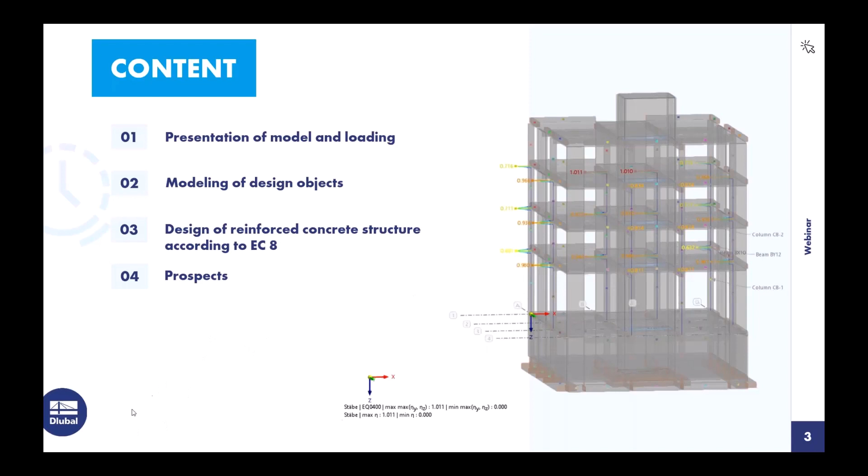For this, we have webinars provided on our website where you can follow the concrete design in detail. Then you also need to do the seismic analysis according to Eurocode 8. For this, we also have special webinars provided on our website, where you can follow the modal analysis, the response spectrum analysis, in detail.

We now go to the program. I open my model. I want to open this one. Yeah, this is the building we will have a look at today. But before we do this, we open the base data.

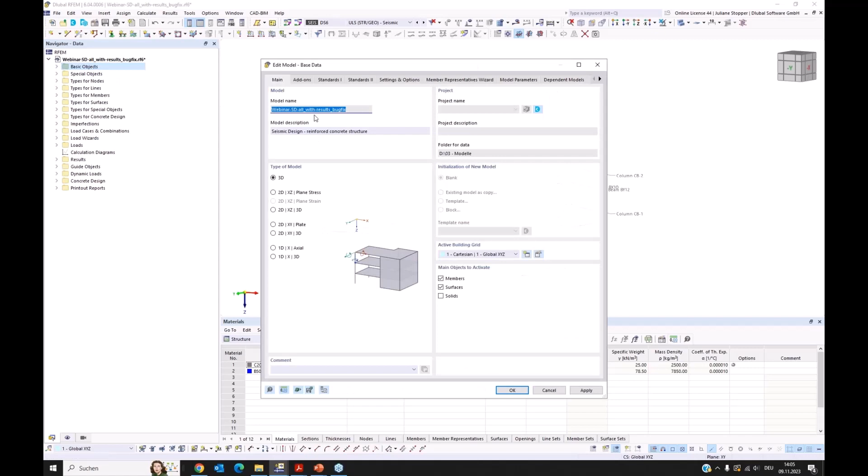In the base data, you can see we have our register for add-ons. In my model, I have the concrete design active, and for dynamic analysis, the modal analysis and the response spectrum analysis active. As you know, in our finite element program, when you activate these add-ons, the needed input dialogues and program parts and output for these add-ons are integrated.

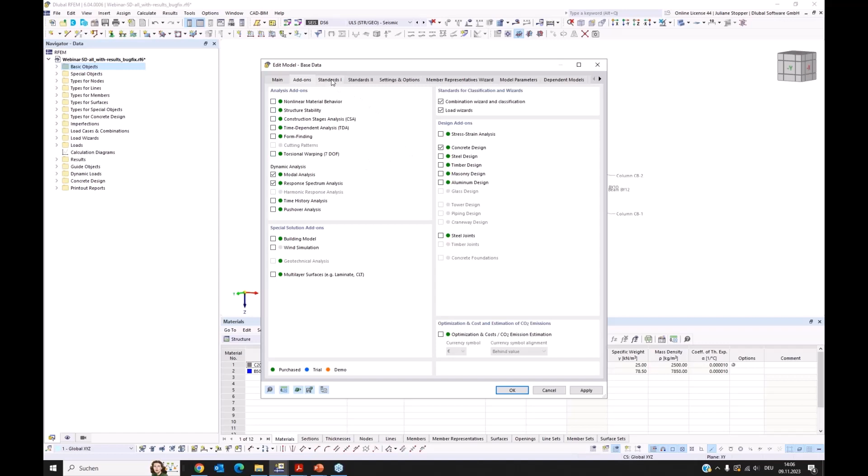So what we need to look at next is the standards register, because you have to tell the program according to which standard the design shall be done, and also for the dynamic analysis it is needed to be given. So today we will use the Eurocode as standard, and I want to show you we have here an overview of activated standards. If you select the concrete design here, you can see the standards activated in the concrete design, and you can see that we have Eurocode 8 now integrated.

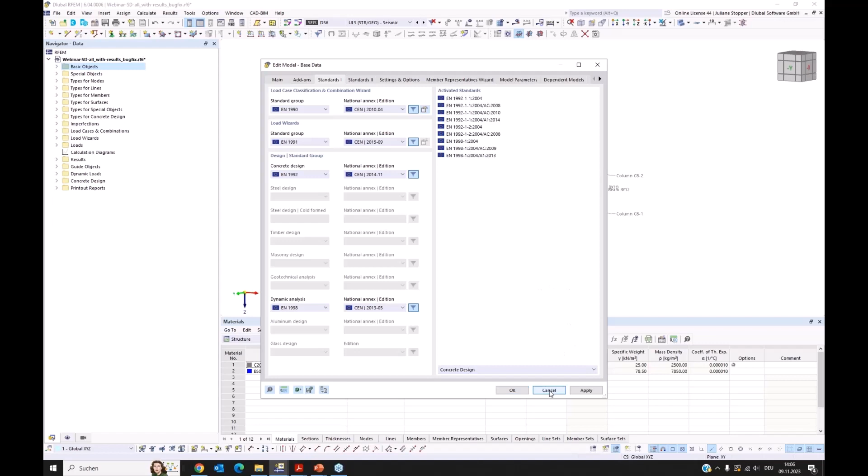Okay, this is enough, I think, for the base data. Nothing else that is new. Then we can go back to the model and have a look at it a bit.

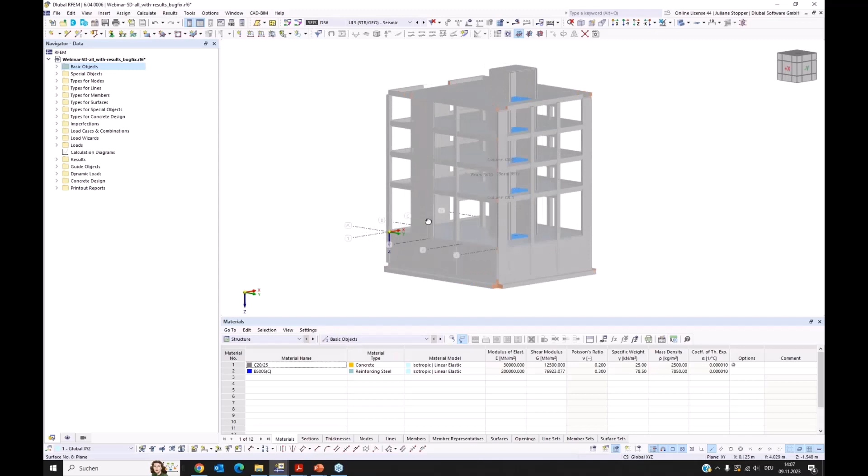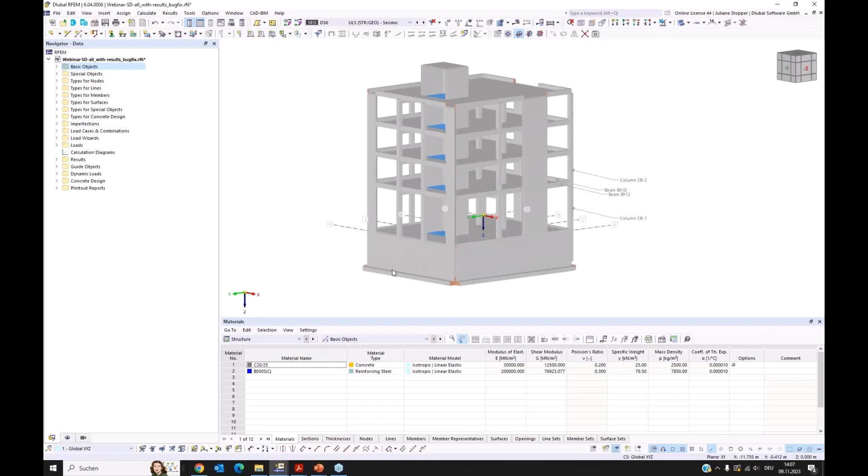So it's a reinforced concrete building that has 5 floors, and we have shear walls at every side, at least one, and we also have this U-shaped concrete core here in the center of the building. We have columns that go from the bottom of the building up to the top continuously, with the same cross section along all over the height. And we have beams between all vertical members placed.

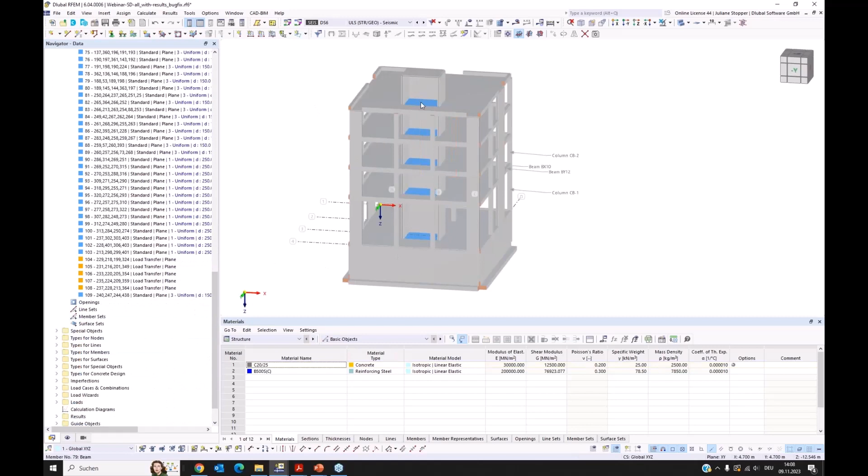You can see these blue surfaces in the building. They are used to allow load transfer surfaces, for giving a simplified load for the staircase. Okay, I go back to the top and close this.

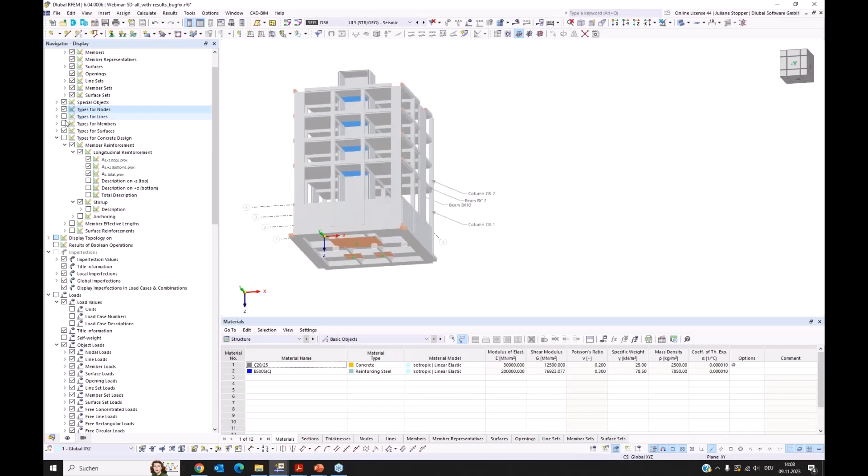Then, this is what I wanted to tell. Maybe I can show also the supports. I have nodal supports at the bottom and line supports. We can activate here, and there you can see that it's grounded on springs.

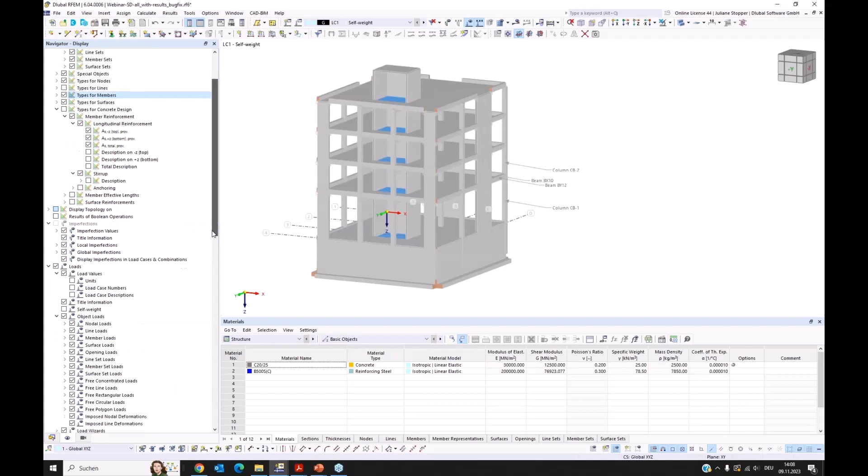Okay, then we can have a look at the loads. We can activate them here, and I have in my model the load case 1, which is for self weight. If you want to check what the program calculates from the cross sections and the materials weight, you can have a look at this and check these values, for example.

Okay, I deactivate this. Then I have in my building a dead load placed, and also a live load.

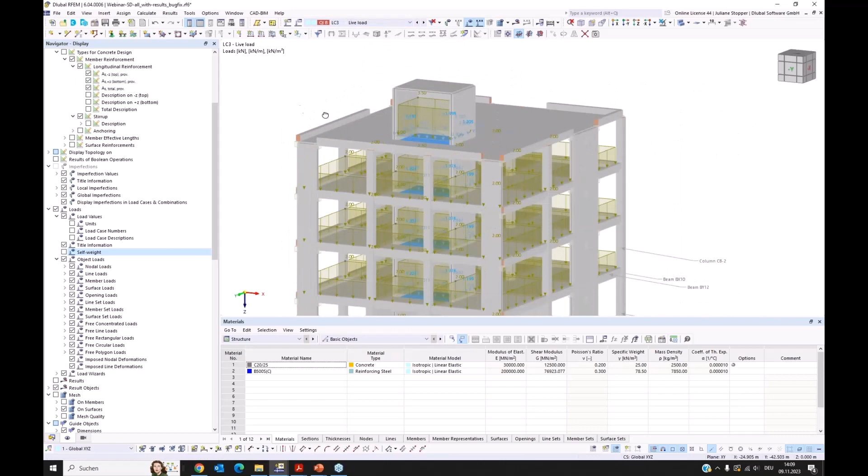Then I want to show the dynamic loads. Therefore, I go into the dialog where they are defined. We have here load cases and combinations, and I open this. Here we can see our load cases. So we had a look at the first 3 of them, and my 4th load case is a load case of the analysis type modal analysis.

So it's selected modal analysis, and there we can check the modal analysis settings. I will just show them. As I said, we have extra webinars where you can see in detail why which setting is needed or used, or something else, and we also provide trainings for this.

So in my situation, I have 10 modes considered, and we consider the X and Y direction. In this register I have user-defined settings, that I neglect masses, and I neglect masses from some structure parts that are placed in the support plane, let's say at the ground.

Okay, then the modal analysis needs a load case or a load combination defined. From that it can take or import the masses. So I have this combination 8, and from that the masses will be taken in my load case 4.

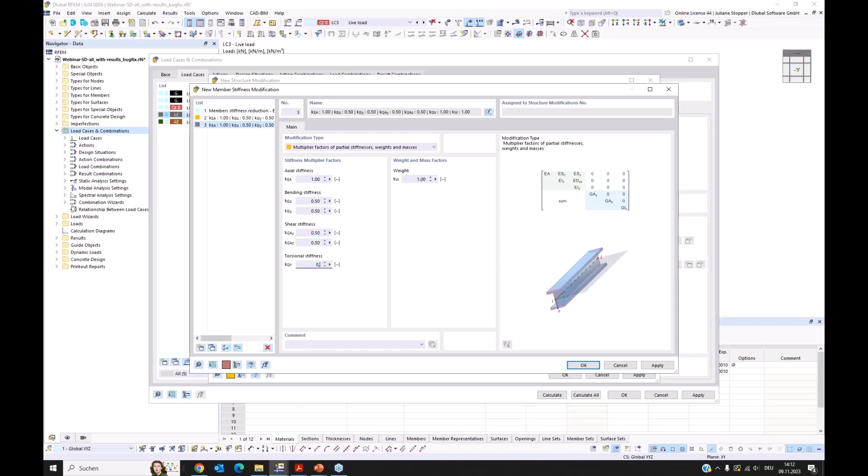And I select the modification type. I want to have factors for partial stiffnesses, and here I can select reduced stiffness of 50% for bending and for shear. In my model, I have torsional stiffness of 10%. Okay, and then you can assign it, and you have a stiffness modification here.

This is what I now created. And you have to assign the members, of course. I only wanted to show this, I have this already prepared. I can remove this, and we can have a look at it.

Here, like I said, you can define the stiffnesses and reduce them. I also renamed it, so it's easy to follow why I have this here. It's according to chapter 4.3.1 of Eurocode 8, clause 7. Okay, so this is how my modal analysis load case is defined.

Then I have my response spectrum. I have this analysis type, response spectrum analysis, set for this load case, and this load case needs a modal analysis load case assigned, so I have my load case 4 assigned here.

And I have spectral analysis settings for this case that I also only want to show. I have the SRSS combination rule, and I have the settings activated that I want to save the results of all selected modes.

And the directions will be combined by the 30% rule. Yeah, these are the settings that I used in this model, and the accidental torsion is activated.

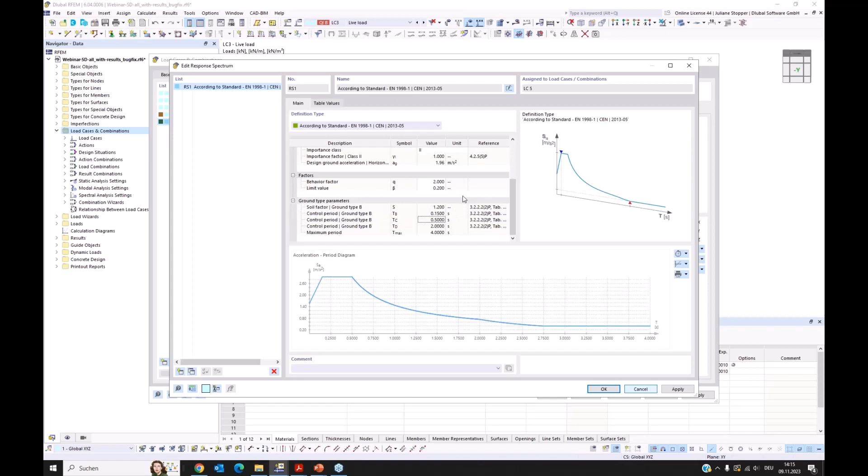So we have in our response spectrum the behavior factor 2 assigned. And we can also see here these ground type parameters, and we have these periods, and this one, the TC, will also play a role later in the concrete design. Okay, then we can leave the spectrum. Yeah, that's it, what I wanted to show for these dynamic load cases.

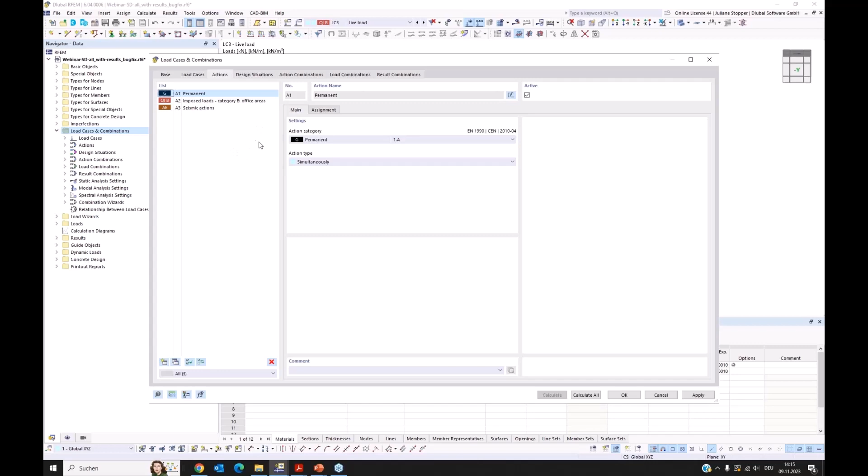Then we can have a look at the further registers. These are the 3 action categories that are now modeled in this file, summarized. Then we can go to design situations. We have the design situation 1, 2, and 4 that are known from the concrete design according to Eurocode 2.

And we have this design situation 5. This is the design situation that was created for receiving a load combination where the mass for the modal analysis can be taken from. So we have here design situation type. We can open this and we can see seismic mass combination type.

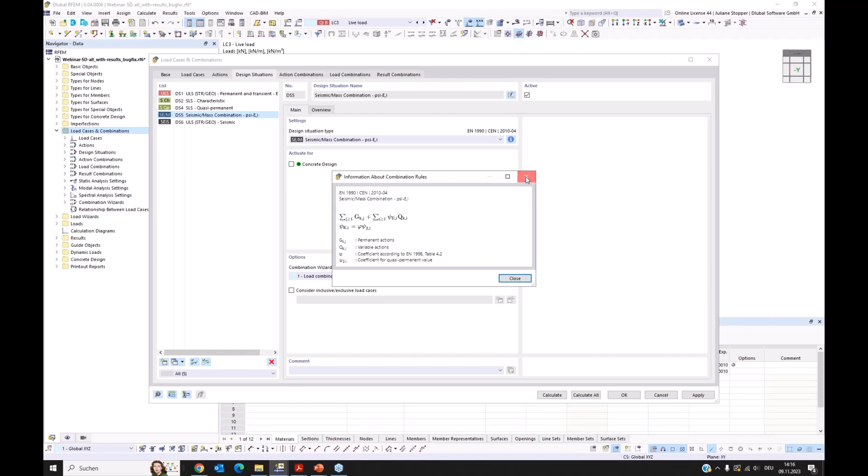Yeah, and if you want to see the rule of combination, you can click on this button. So this is the design situation type. This is the design situation that creates my load case for the modal analysis for the masses.

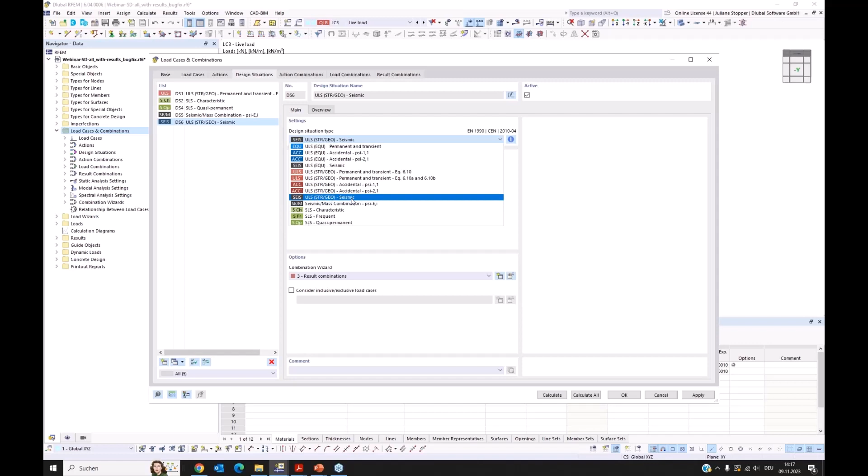For the concrete design, I need this design situation 6. We can have a look at the types again. There we have the seismic type, the ULS, STR, GEO, seismic. This is the combination type

according to Eurocode 8, for the seismic design according to Eurocode 8 for concrete members. Yeah, for other designs it could be also used, of course, but now we have here concrete design.

And we assign a combination wizard here. We have the response spectrum used, therefore we need here a result combination type. So this design situation generates result combinations for us. When we look at the previous design situations, they create or generate load combinations.

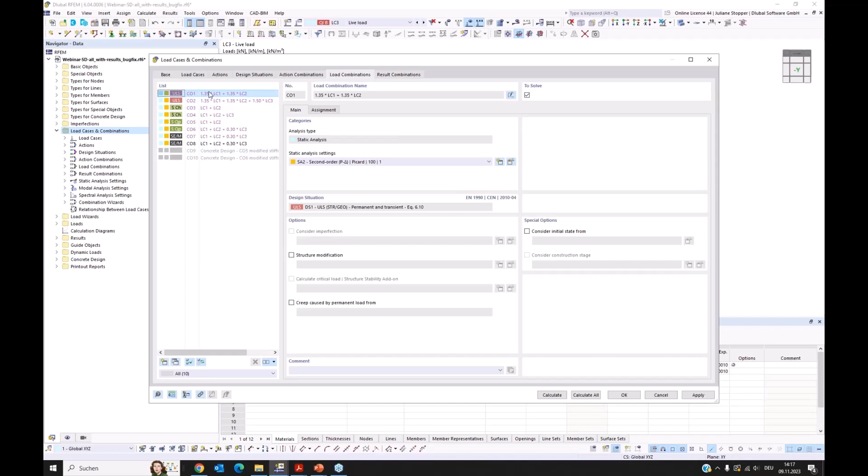Okay, then we can see our actions combined, and here are the load combinations that are generated from the first design situations, and we have here in the result combination the seismic result combination. Okay, that's all what we need for the design from the loads.

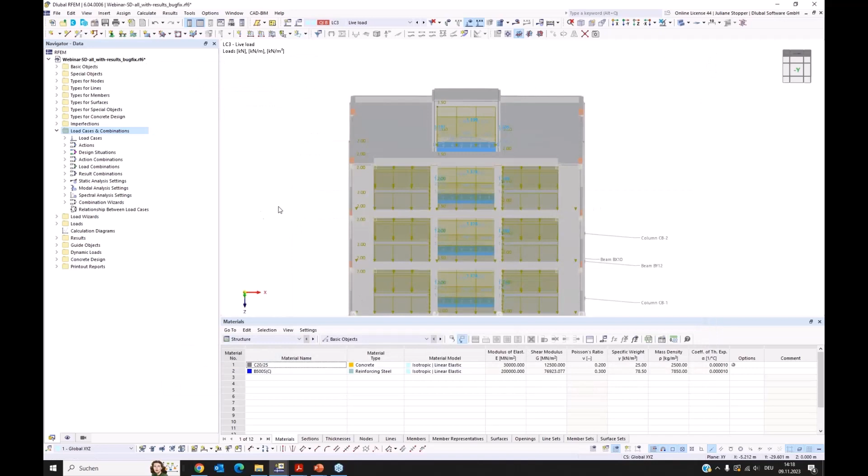I will close this. I have already results in this model, so I don't save a setting or something. Okay, this is it from the model and from the loads. I would like to shortly show you some results here.

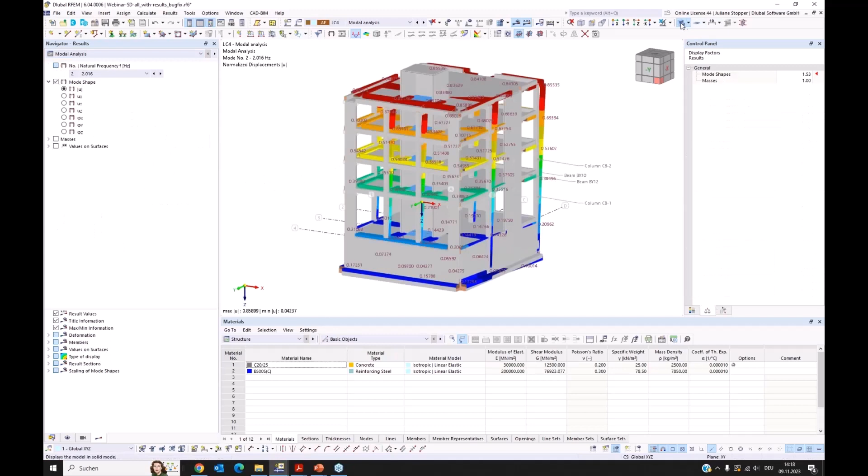We have results that we go on the results button. We can shortly see the modal analysis. Yeah, here we can see the first mode shapes.

We can see that the first shape is more in the Y direction and the second in this direction. No, this one is the Y direction, the first one was the X direction.

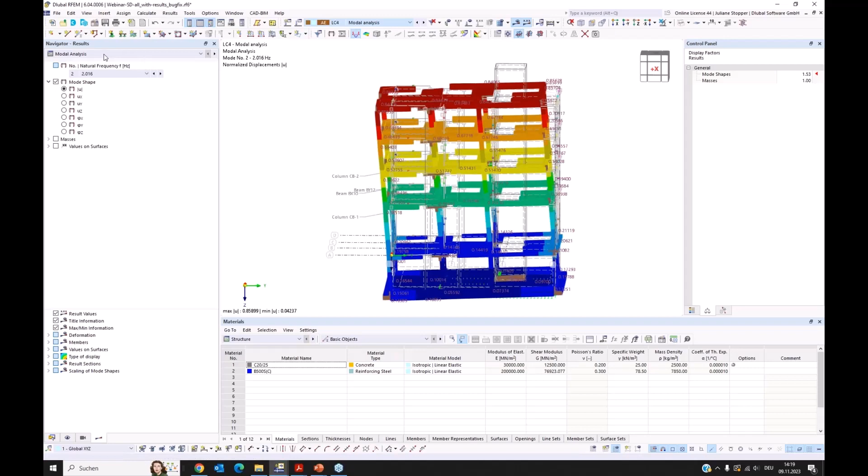So we have the modal analysis results, and we also have the response spectrum results. In the response spectrum, here spectral analysis, you can check the inner forces that come from the response spectrum in the members. These forces then are taken for the result combination and later go into the concrete design.

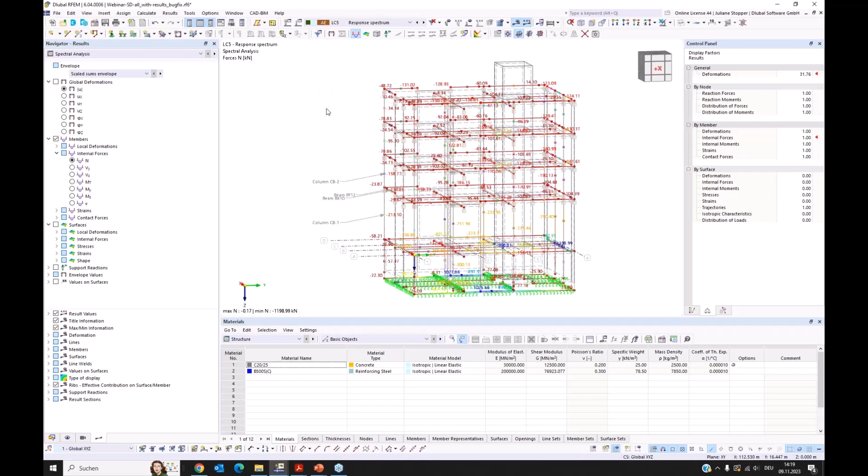Okay, so this is a short view on results. I will again switch them off and we go back to our navigator. Now I want to come to the concrete design.

My model already has reinforcement. I can also show this. Yeah, we have in the navigator display, we have the option to display the reinforcement, and I will do this now just shortly for you.

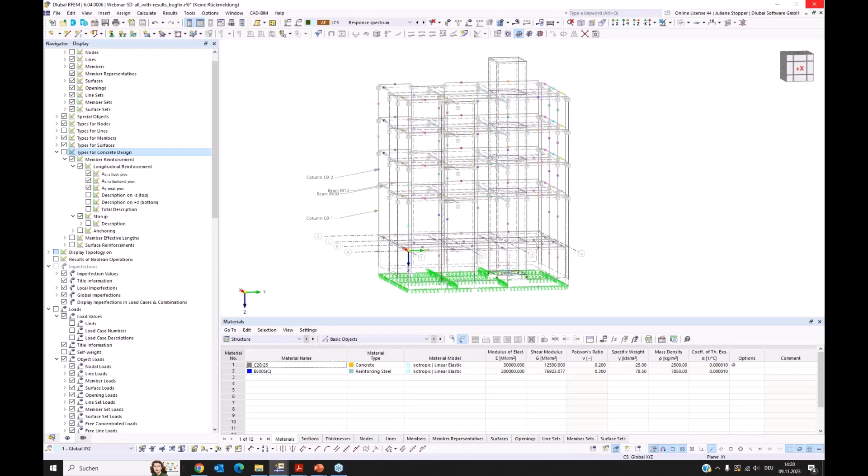Here we see all the members in my building that I have reinforced now.

If we look here, I can click on the column, for example, and do a right click, or you can also do a double click on the member. This works as well. I want to show the reinforcement.

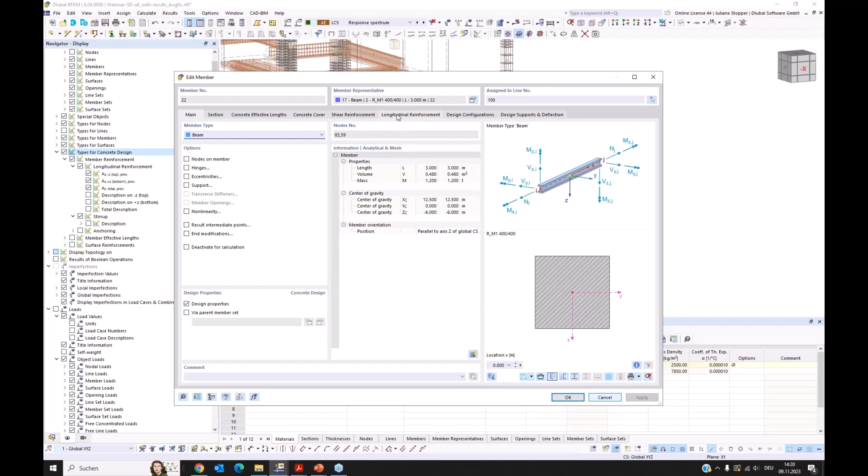In this column, I have uniformly surrounding longitudinal reinforcement, and I have here the shear reinforcement. What we have and need for the seismic design is these cross ties. They are needed to have a more confined concrete core in order to receive a more ductile behavior of the members.

So you can activate it in the shear reinforcement, and you can modify it via clicking on the longitudinal bars. If you have more longitudinal bars and you don't want cross ties between all of them, you can just click on the longitudinal bar and the cross tie will disappear or come back. Yeah, this is the thing about the cross ties.

Okay, as we are already here, I want to show in a short excursus, a feature we recently released. You have the option always in a member to see the reinforcement layout, and you can modify the way it is displayed here.

You can, for example, do a setting where you only see the longitudinal bars and no stirrups, or something. You can do as you like it or you need it.

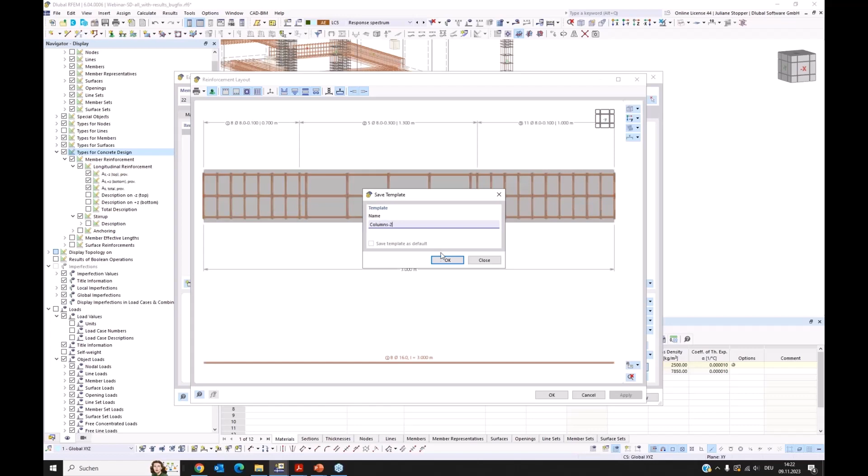But for you, okay, now I printed this setting. It can be something else. But now I did this one, and now I have this template saved the way I like my reinforcement layout, and I will go back here.

Now if you say print graphics to printout report, it's possible to deactivate this button. I don't want to now print the model or the loads or the add-ons. We have the multi-print activated, and I don't want these. I want to show you the graphic templates.

So these are templates that I have prepared before, and I now want to use my column reinforcement template. You can use it for all members. Now it's 195 detected, but I want to select it, and you can use this mouse for picking the members you want to print with this layout.

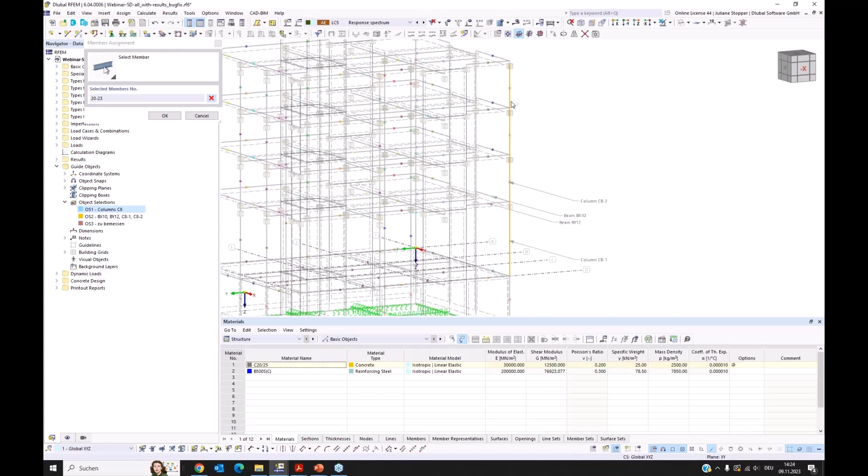I have an object selection prepared. I have now my columns C8, these are my columns in this position for the whole building. I want to print with this reinforcement layout that I prepared before.

And yeah, I go back here. Okay, I can say okay, save and show, and then it is printed now to the printout report, and after it is finished, it will show the result to us.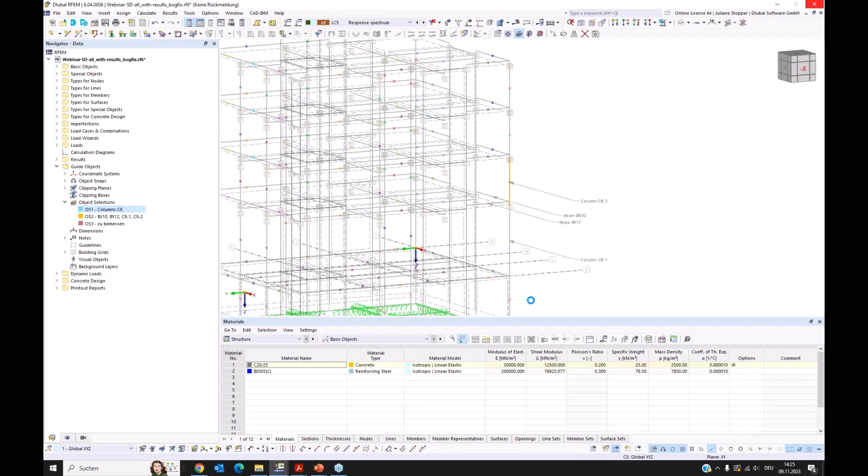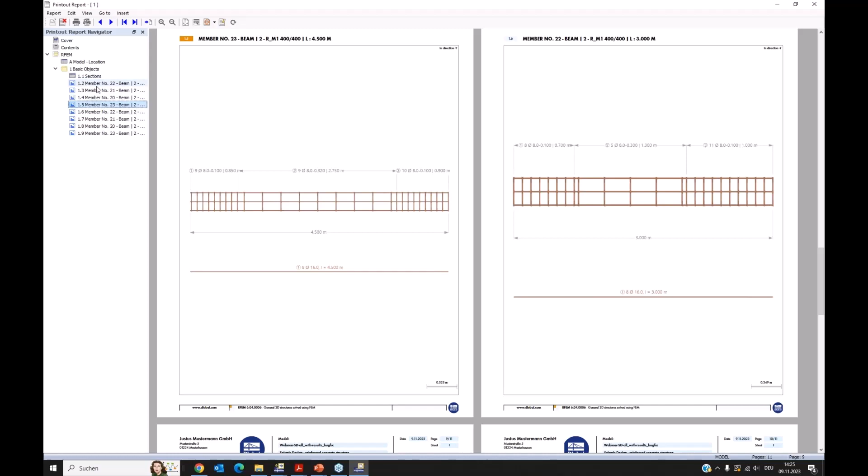Okay, I had a very short printout report prepared, so we can have a look at this. And now here you can see the members that are all printed with the same layout, and you have these graphics here. So with this template you can easily print for a lot of members the reinforcement layout.

Okay, enough for this. Let's go back to our seismic design. I want to show the building again like this. Okay, now I want to go to the further seismic settings.

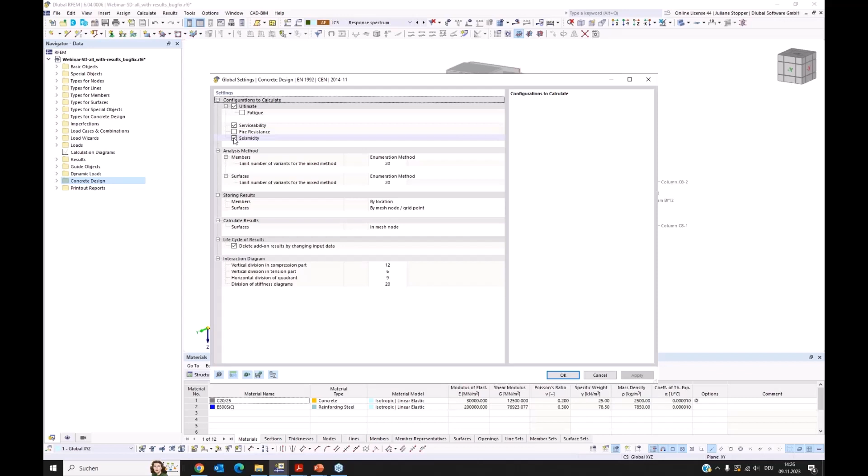We have here the folder for concrete design, and if you do a right click on this, you can reach global settings for the concrete design. In this first field, you can select which configurations you want to have in your model. In my model, I have ultimate active, serviceability active, and I have the seismicity active. So if this is activated, I have seismic configurations in my model.

Okay, and at these we will have a look now. Here you can see the seismic configurations, and I open them now. Okay, and we are here. I collapse them. So here we have all the configurations you can do for controlling the seismic design.

The first setting that we provide is the selection of the ductility class. We have the known low ductility, medium and high ductility class. If you select the class, the provided input here changes. So if we go on low ductility class, you can see that the configurations were reduced, because the low ductility class needs a design according to Eurocode 2 and has no further requirements for capacity design or ductility, but only a very small behavior factor is allowed. So it should be taken only for low seismic activity.

Okay, so let's go back to medium ductility class, as we can see more of our settings like this. Okay, the second option is the option to define the structural system type. And if you have the case that you have different types in the different directions X and Y, you can also activate this check, and you can define the system type for both separately.

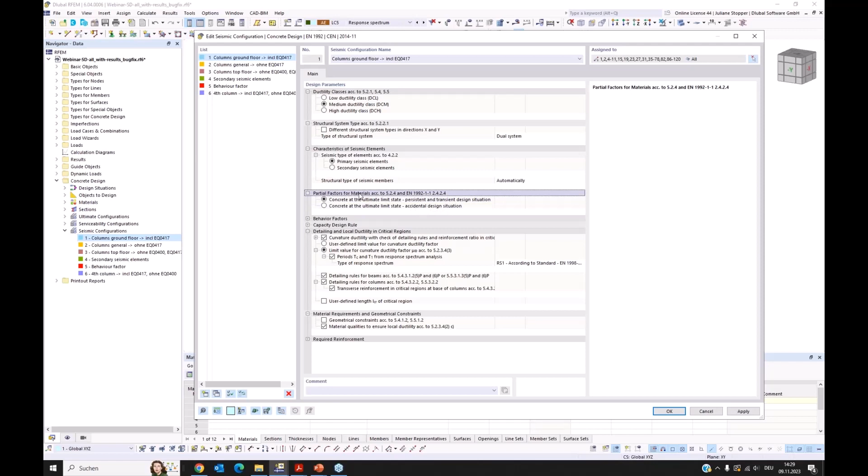But I now want the primary seismic elements. As an example, I have here a configuration for secondary seismic elements, as it could be useful in another building, but now for me, I go on here. Then you have the option to change the design situation to accidental design situation for the definition of the partial factors for materials. And then, collapsing all again, we come to the behavior factors.

This is a check. If you activate this, you activate that you want your behavior factor to be checked, so the used behavior factor is checked whether it's below the upper limit for the factor. And you have the option to define user-defined values.

Manually the behavior factor that was used for receiving the loads you assign in your model, or you have the option, if you did the dynamic analysis in our program and used the response spectrum, to take this value over from there. So I do it - we saw our response spectrum and saw that we have the behavior factor, which is 2 for this model, and I want it to be taken in my check.

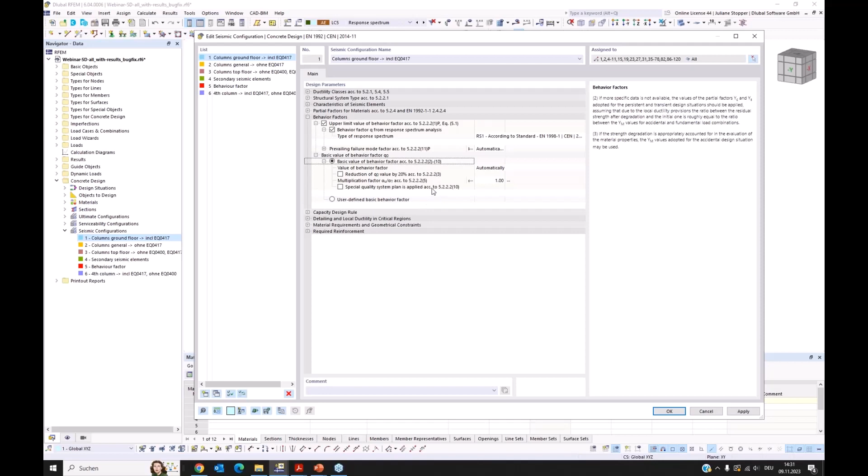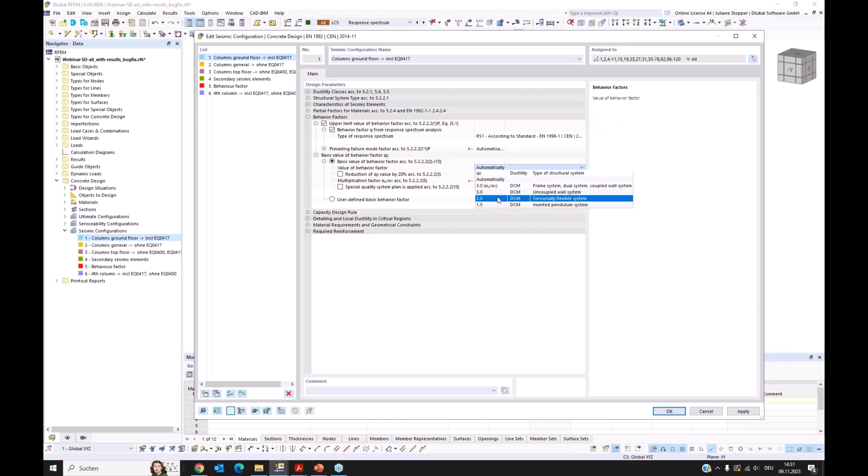Then you have settings for the basic value of behavior factor that goes into the upper limit value. If you have this special quality system plan, for example according to this clause of the standard, this has to be looked at with time. The basic value of behavior factor can be found automatically dependent on the system type and ductility class you assigned, or you can also define it directly, select it by yourself, or give a user-defined basic value.

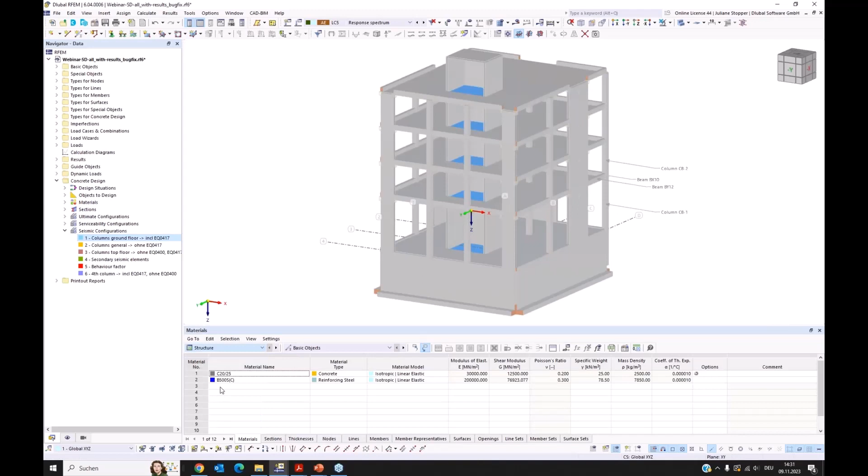We can have a look at this check shortly. As I said, I already have results in my model. If you look here at the concrete design, we see - and I can do it here too.

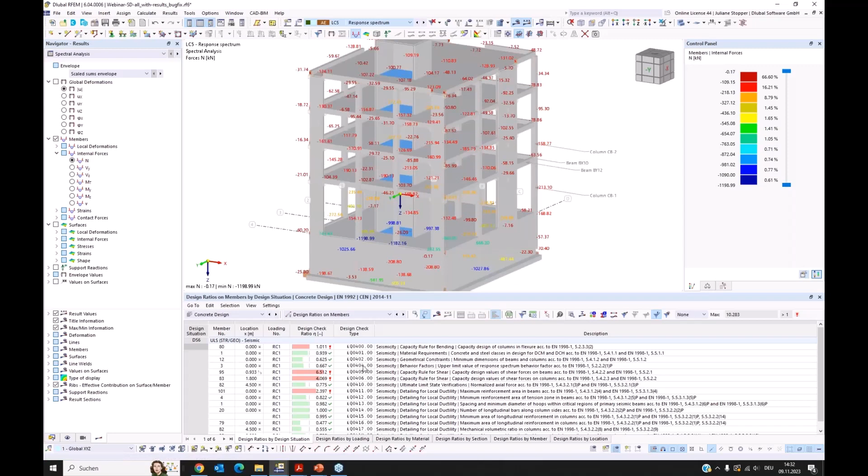We see here all the design checks that are done, and the check about the behavior factor is our check 0404, and we can have a look at this. If you double click on the design check type - no, I want to go back to concrete design. If you double click on the design check, you get into the design check details, and we shortly have a look at it for the behavior factor.

Here you can very well follow what the program does. So we have our basic behavior factor and the factors that you defined in advance, and the limit value is found. Then it is compared with the used behavior factor for the calculation of the loads, and we see that it's taken from the response spectrum, and we have the 2 here. So this works well, that we take over from the dynamic loads these parameters that we need for the design as well.

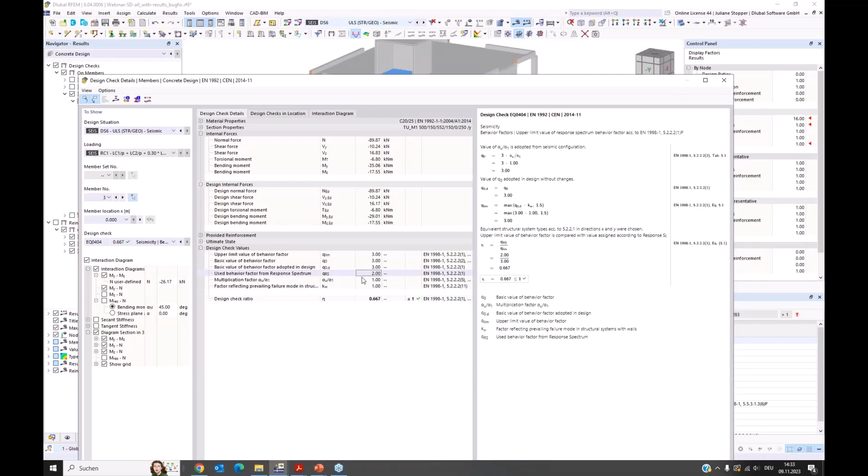Okay, I can also reach the configurations from the table here. We have the input data here, and here also, as you can see, our configurations and the seismic configurations. So I can also open them from here. And we are back in the configurations. I can collapse them, and now we come to the capacity design rule.

With the capacity design rule, you can control the failure mechanism of the model of the structure, and for this two main checks are required. For this, I will go to the presentation shortly. What we need is to fulfill equation 429 of Eurocode 8, which is about the relation or ratio between the sums of the design values of the moment resistances of beams, here denoted B, and columns. This equation represents the strong column weak beam concept.

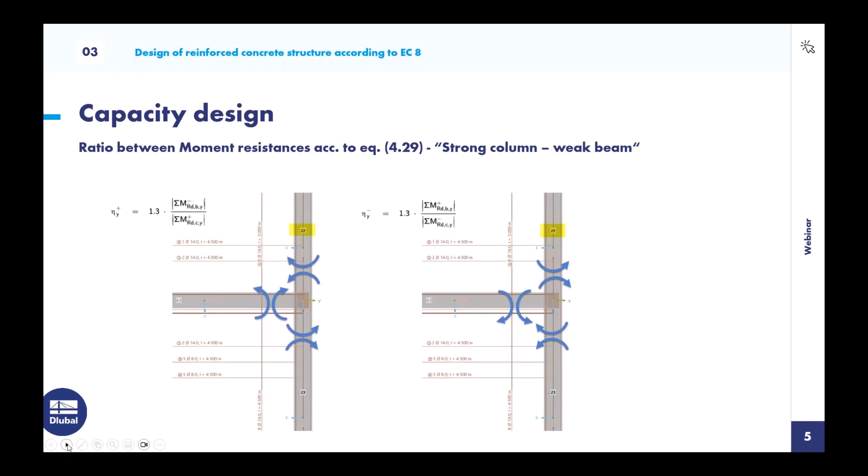So we require that the moment resistances of the columns are stronger than the moment resistances of the beams at a joint. We have to check this equation for all joints, for all nodes. This is the one check, and the second is the related capacity design shear check. This applies when you reach the moments that equal the moment resistances, then you can calculate the related shear force in the member. For beams, you also have to assign the quasi-permanent load. This shear situation has to be checked, because you don't want failure earlier because of shear, which is also brittle.

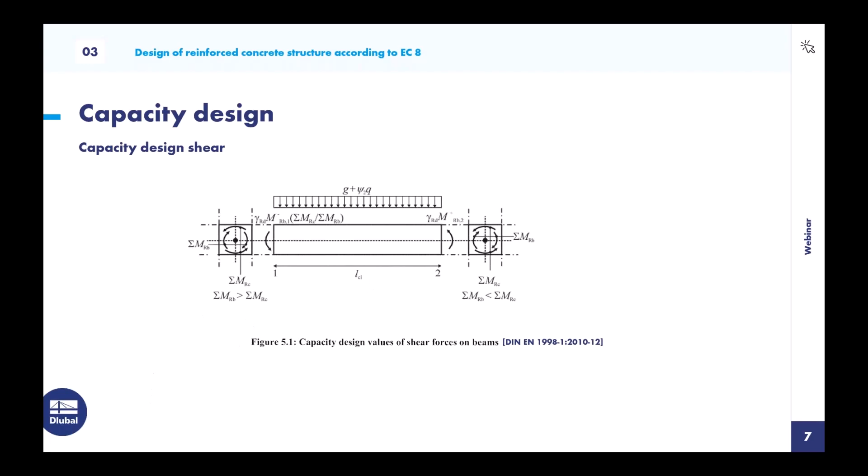So you have to check this situation when you have the moment resistances reached at the member ends, and the quasi-permanent load. This shear force has to be checked as well. Let's go to the configurations again.

In the first checkbox, we activate the strong column weak beam rule. We can also see here the equation 429. And in the second check, we activate the shear force, the shear check for capacity.

Then you also have the option to define overstrength factors for beams and columns. And we have here the detailing rules and the ductility checks. At the top we have the curvature ductility checks, which are provided indirectly via the requirements for detailing rules.

So with fulfilling these detailing rules, the curvature ductility check can be done. We have one checkbox for the beams and one for the columns. And for these checks, the limit value for the curvature ductility factor is also needed. Here again, you have the option to take the values Tc and T1 from the dynamic load, from the

response spectrum that you assigned. Again, you can assign it here. If you don't want this, you can assign these values manually, or even assign a curvature ductility factor, a limit value for it, manually.

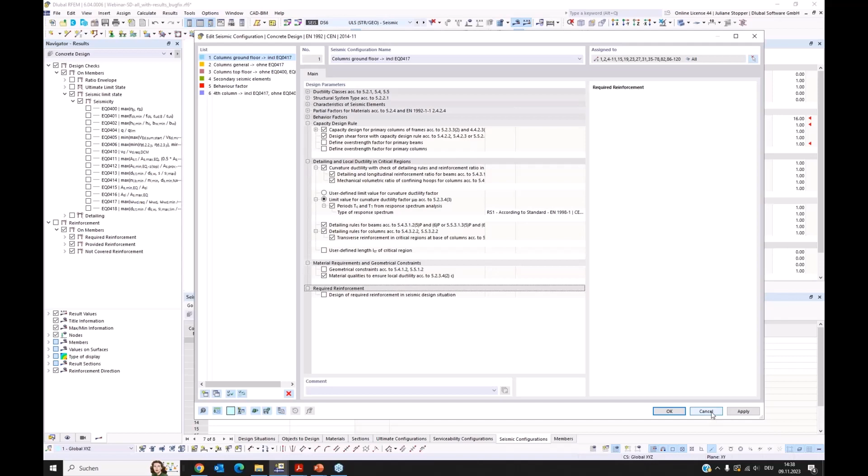Okay, this is it for the seismic configurations as an introduction. Now we will have a look at some checks. As you saw, we provide the option that you can select quite detailed which checks shall be done or shall not be done, and this allows you to make specific configurations for your situation.

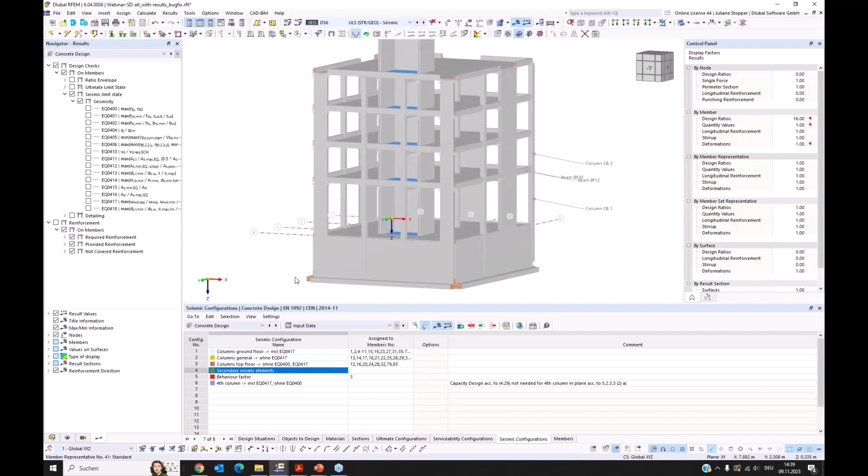For example, I have for the top floor another configuration which doesn't do the strong column weak beam check, as I don't need it for this floor. You can also have a setting for the secondary members, and you can modify it quite functionally for your situation. Okay, and now we have a look at results.

I will first activate this check. It's the EQ 400, and this is the capacity rule, the strong column weak beam check.

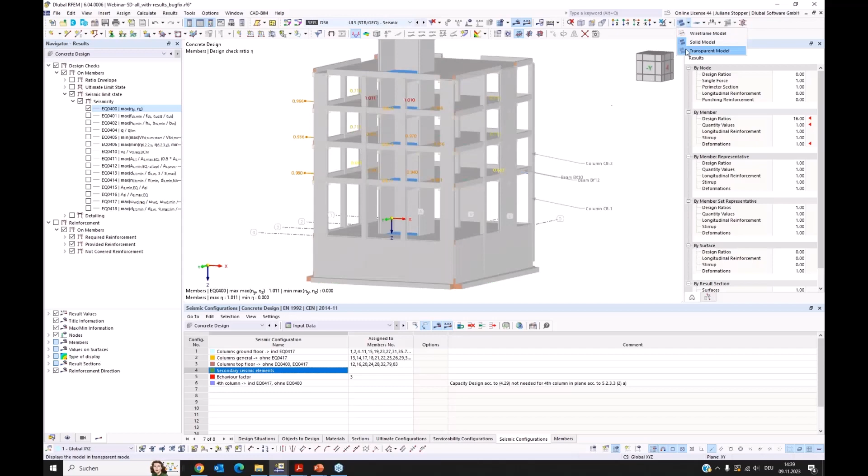If we go here to the wireframe model, or maybe the transparent model—no, let's go to wireframe. You can see that in all these nodes where columns and beams come together, this check is done. And I want to now have a look at this with you in detail.

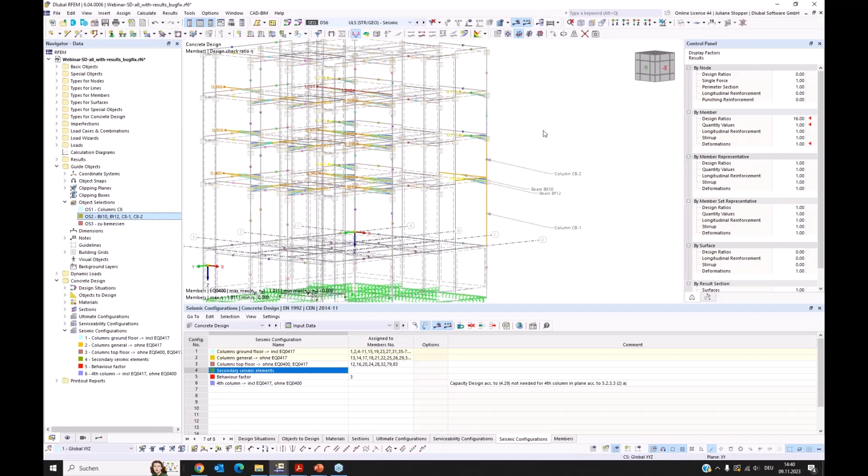Therefore, I use these members that I have given names here, as it is more easy to work with, not all of them at the same time. I have prepared guide objects here. I have an object selection which contains these members, and I can click on here and set my visibility so that only these are displayed.

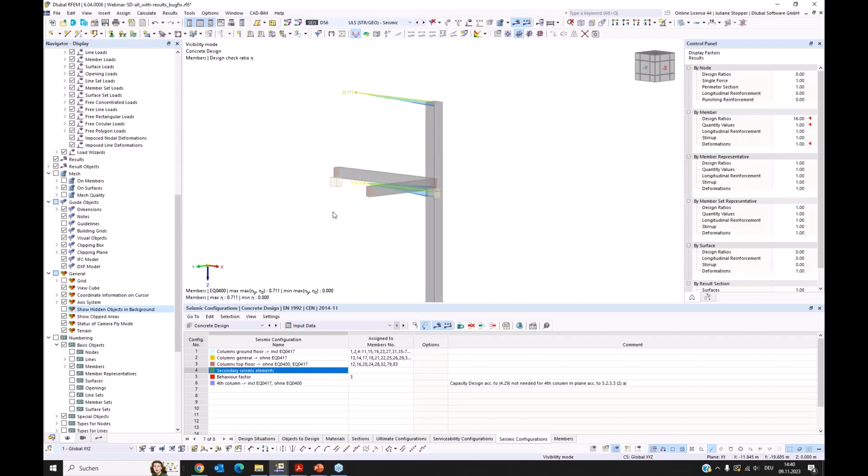And if I go to this view, I see my selected members, and I have a kind of shadow display for the rest, which I can also switch off. Sometimes it's good as an orientation, but now I don't want to see this. I want to have a look at these members.

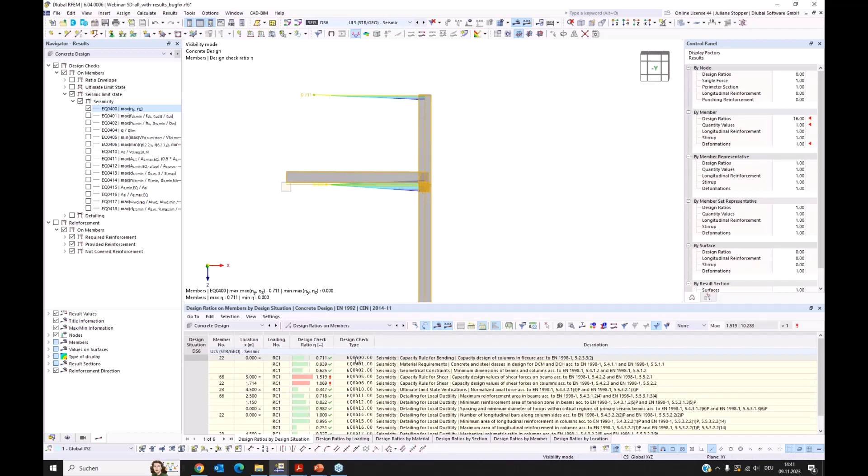Okay, we have the results graphically, and we have them also here in the table. I can go on design ratios on members, and here I have, if I select them, also my EQ 400, the strong column weak beam rule, and we come to the design check details.

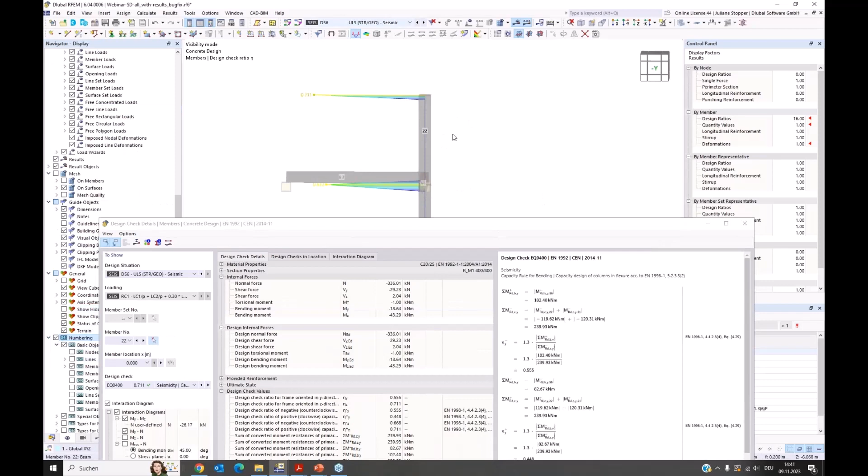Okay, here you can see that the program does the check. The strong column weak beam rule we do check in the column members, so I can open numbers for them. I have here my column number 22, and in this member, at the end and at the beginning, the strong column weak beam rule is checked.

So if we look here, now I'm at member location 3. I want to also see the local axis. So position 3 in this member is this node here, and I want to have a look at this. So I again go to location 3.

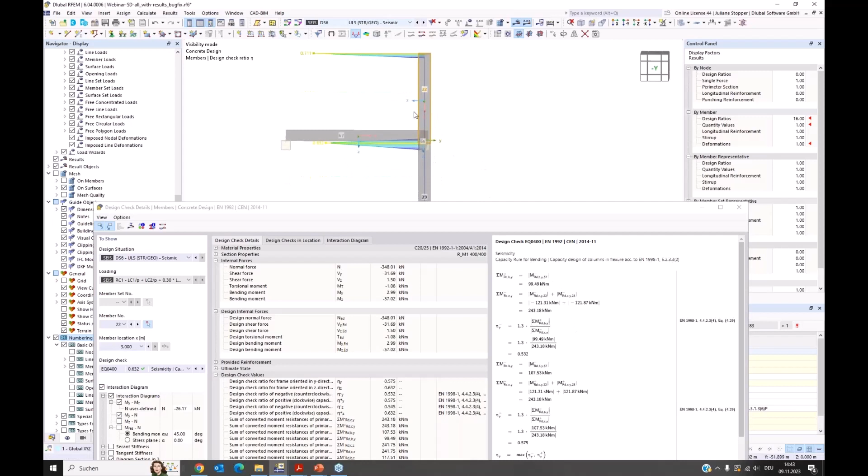And as we can see, we have the Y direction. So all these indices are dependent on the column. So I have the moment resistances around the y-axis, around local y-axis of the column, that are checked now at first. And for this, around this node, around the y-axis, in this direction, beam 67 is relevant. So the program found beam 67 and took its moment resistance. And then the columns from top side and bottom side of that node are considered here as well.

And we can see, if we click the values off and just look at the formulas, we can see that we do the check in both rotation directions. Let's say we have here the minus around y and the positive around y, and the same for the z direction. And for the z direction, the other member, member 66, is considered. Now here we don't see it, it's now in the direction of view.

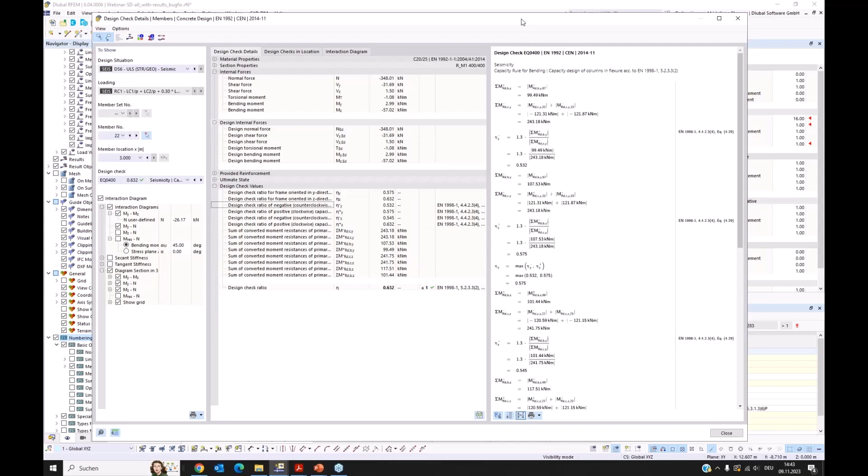Okay, so let's go back to values. I want to now with you find the value for the moment resistance of the column. Therefore, here in the column, we are in this member number 22, we are in this column, we can open this result diagram and we can check the normal force in this column.

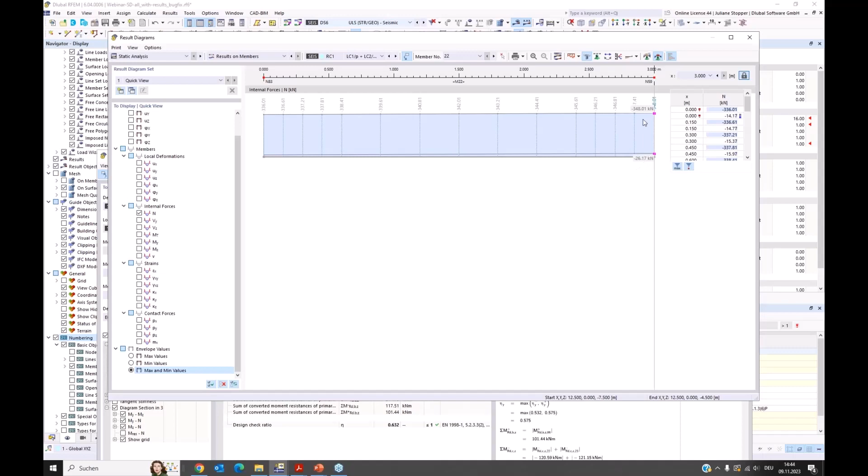And we have a result combination, so we have to check a range of normal forces that can appear. Our normal force lies between minus 26, let's say, and minus 348. And with this information, we can go to our interaction diagram that you can activate here, and then you have this register open here. And if we look at this, we see that with a higher, let's say, negative value of normal force, we have a higher moment in the column.

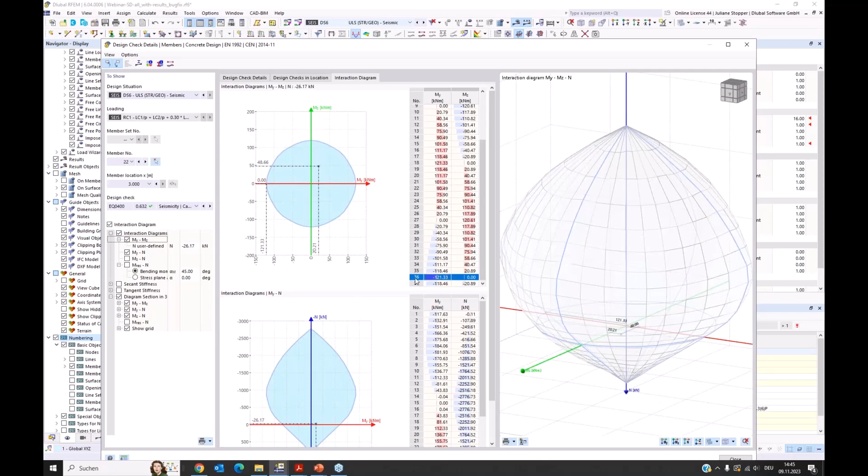And for our check now, the worst case is the lower value of moment resistance in the column. So that's why I have to consider the minus 26 normal force, as it's the worst case and the safe side. And then I can look in this diagram and take my m around y for the situation that mz is 0, and we see we have 121.3, and in minus direction the same, as I have longitudinal reinforcement on both sides the same. If I would have different reinforcements here, I would have different moments.

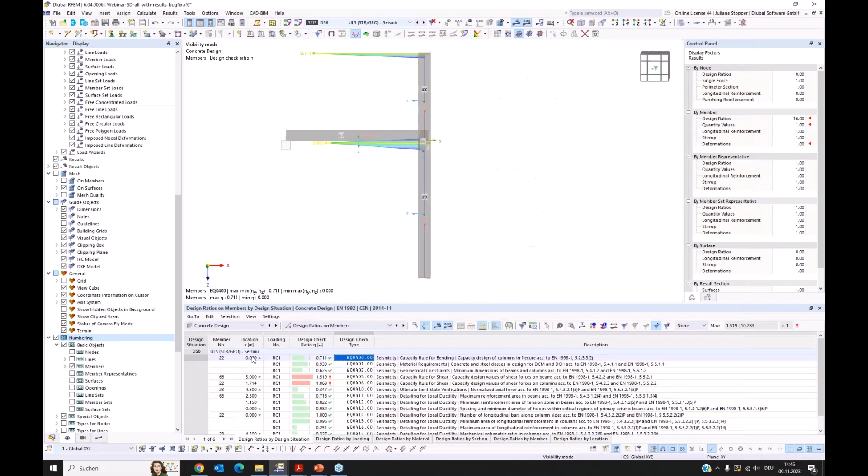So I can come back and we see, yes, our program found the right values for member 22 around Y for the resistance, and here in the other direction. Yeah, and you can do this if you need, you can follow where these values come from. Okay, that's it for the check of the strong column weak beam, or the EQ400.

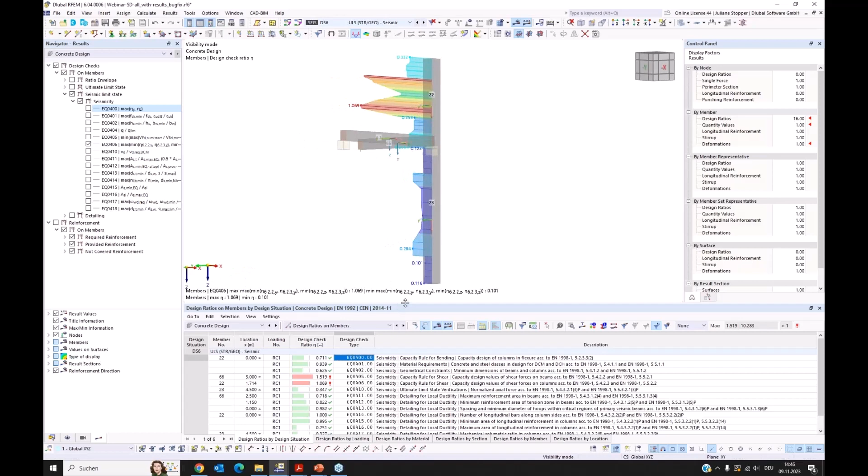Then we have, as we spoke about, here you can see that the 66 is for Z direction relevant. Then we can check the shear force from the shear check for capacity design. It's for columns in our program, it's the 0406 design check, but you can also read it here in the description.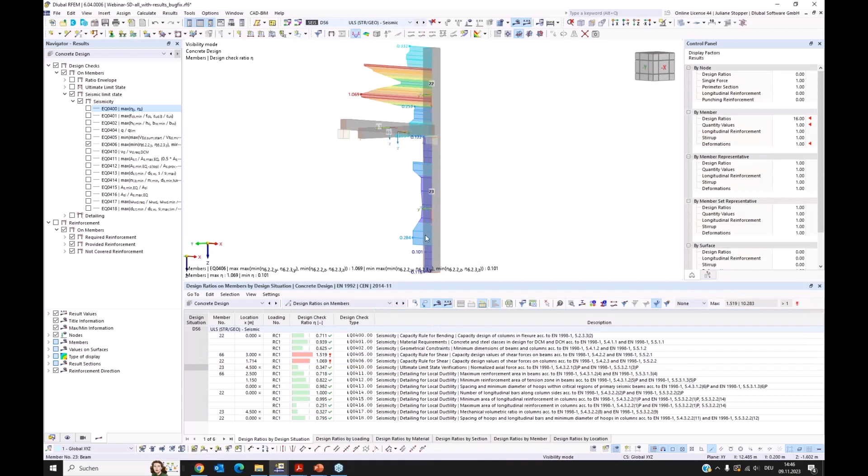Here I have to look at, I have some values that are higher than 1. We will have a look at this now. So I will open this member 23 and we can have a look at check 406.

Yeah, here it comes. And yes, as shortly shown on the slide, here now the moment resistances from member start and member ends are taken, divided by the length of the column, and in this way the shear force in this location is calculated, and this again for the different rotation directions, let's say moment directions, orientations. Yeah, and then we have a shear force, and then with the reinforcement, the shear reinforcement, the normal shear check is then done. It's compared with the shear resistance.

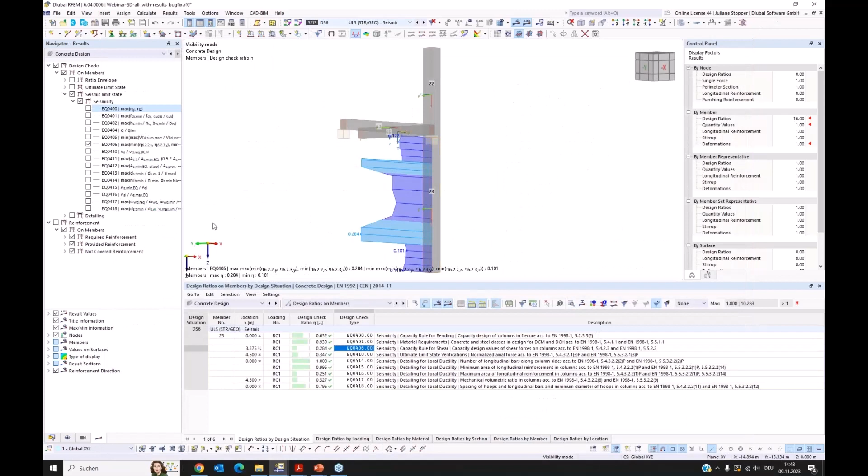This is it for the column. Maybe we can have a look - we have more checks I will show later, but we can look at the curvature ductility check for this column. It's hidden in this check, it's the 417. I double-clicked on it shortly. You can find it there.

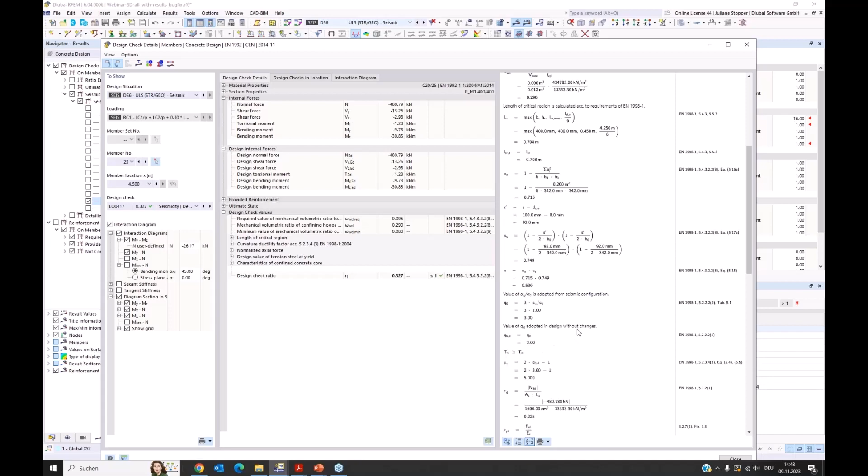Yeah, here it's a check about the reinforcement, the mechanical volumetric ratio in columns. It's for making sure the curvature ductility in the column in the critical region, and this is the check where also the values from the response spectrum are needed and considered. But you can follow this in detail in the program.

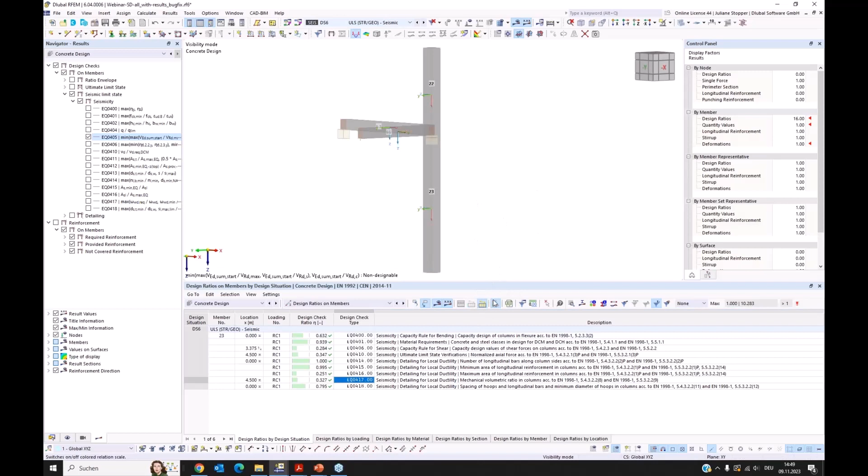Okay, then we can also have a look at the beam checks. As I said, the moments of this node are checked in the column, so we have checked this. Then we can also check the beam. Yeah, we can go into this one.

Here also some - what I want to show is that we have again the moment resistances, this shear force, and we have added the quasi-permanent load.

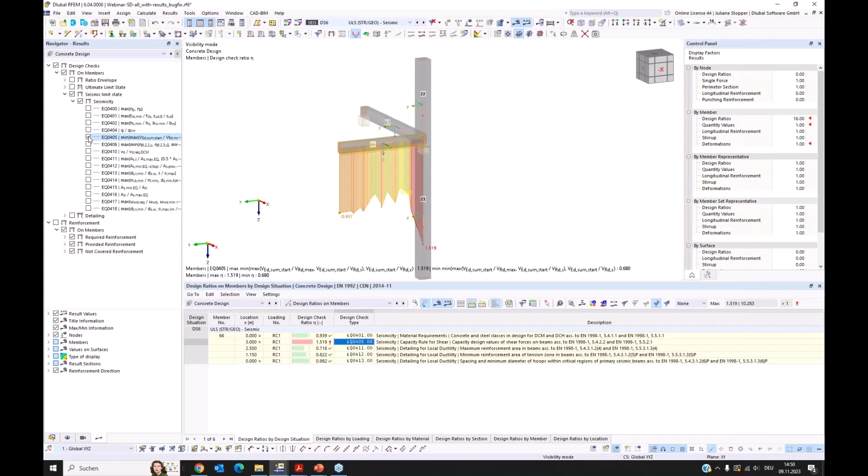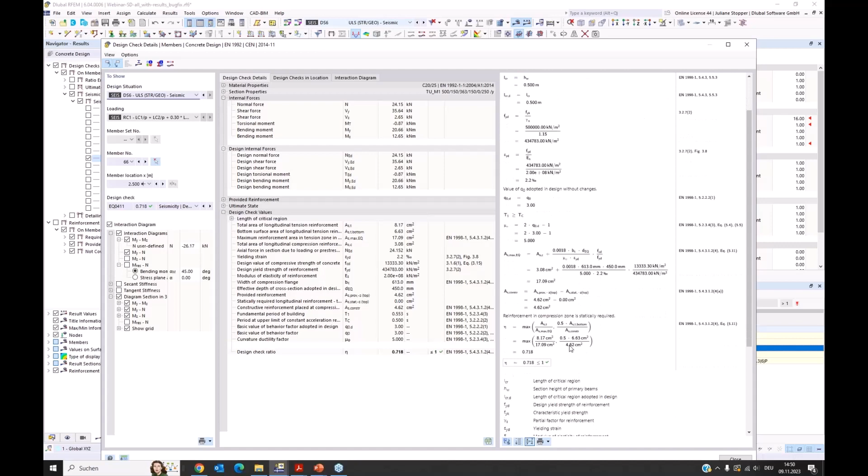And again, the shear force is calculated and then compared with the shear resistance provided by the reinforcement. Yeah, this for the beam, and for the beam we also have the curvature ductility provision, let's say. We have requirements according to the maximum reinforcement area in beams. I double-clicked on it shortly - there it's required that on the compression side you have placed at least 50% of the reinforcement of the tension side. You can follow the information here later in detail.

So this is it for the beam, I think, and we also have here these about the distances of stirrups. Yeah, that's it in detail.

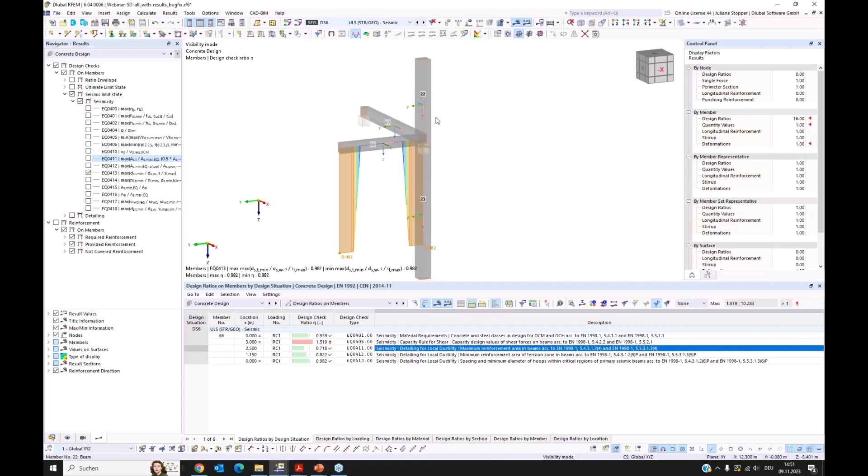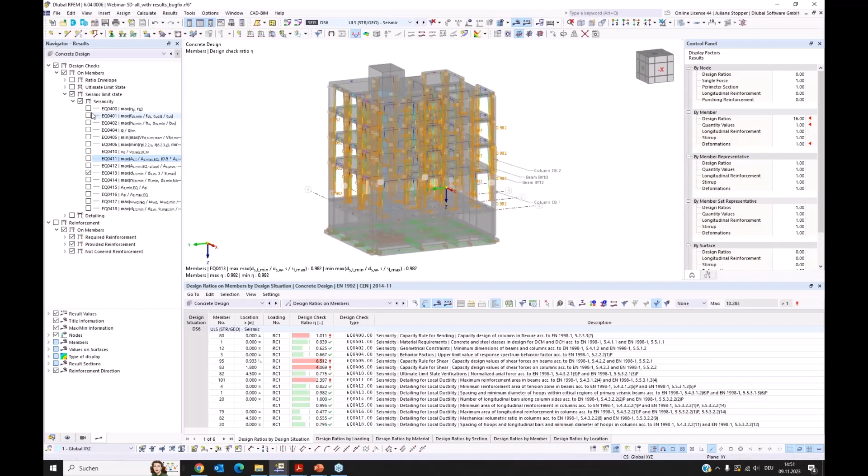I want to again show the whole structure. Therefore, at first we deactivate the local axis systems and the numbering, as it is too much when we see the full building, and we can go back, cancel the visibility mode and see the whole structure, and also uncheck this. And then we can check this for the whole system. If you want to modify the way the results are displayed, you can also change the ratios here.

So here we have the strong column weak beam rule checked for the nodes. Then we have the material checked for all members, and we have the geometric rules checked. I checked the behavior factor just for one, but it's valid for the whole building - I only did the calculation once.

These are the shear results we looked at, and here we have a check according to the normal force in the columns compared with the limit value. And this is the curvature ductility check for beams, and this is the minimum reinforcement check for beams. And the distances of the stirrups we saw.

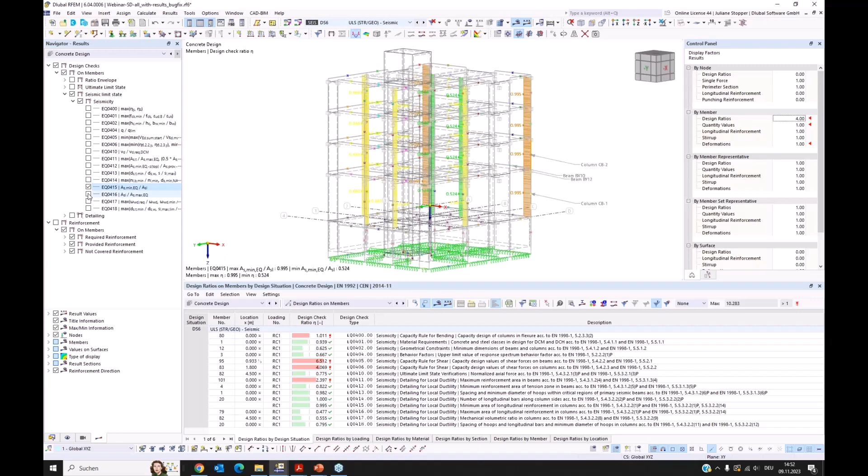This is the number of longitudinal bars required according to Eurocode 8 in columns. Then we have some more column checks like minimum reinforcement, maximum reinforcement, and also the spacing of stirrups. Yeah, okay, this is what I wanted to show regarding the seismic design for concrete members as an introduction.

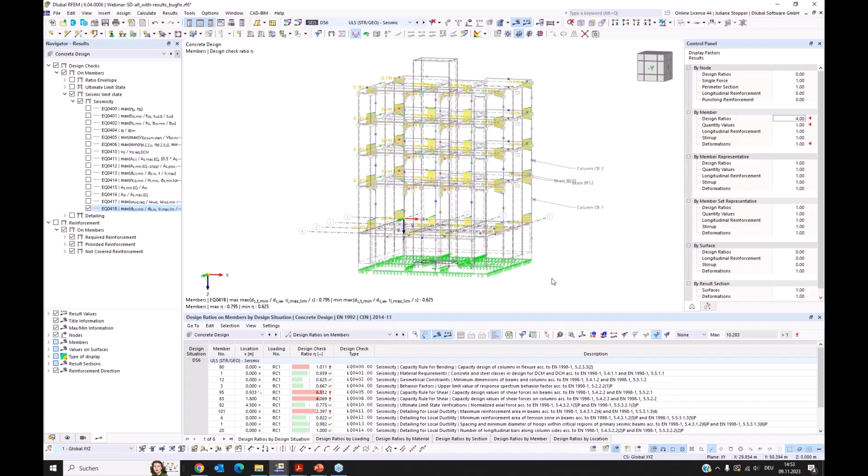This shall be it for this webinar. As a very short prospect, regarding the seismic design, we are currently working on the required reinforcement. We have several of these checks already considered in the calculation of the required reinforcement. We are currently working on consideration of the capacity design checks and the required reinforcement. This will be one of the next features we provide, and we also work on the performance improvement for our seismic design. The next project will be the deep beams and shear walls, the design for it. This, yeah, as a short prospect for the seismic design.